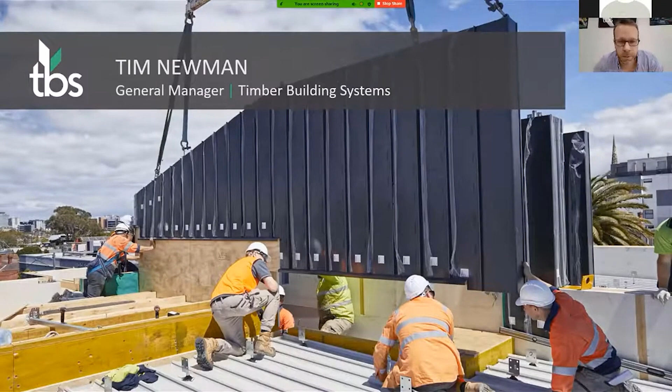So today I'm going to do a brief introduction to TBS, and then I'm going to run through 4 types of projects that we've worked on over the last 3 years, and just go through some manufacturing challenges in each of those projects, and what we've learned and where we are today. And at the end, I'll wrap up with some of the key challenges in fabrication from our point of view.

So TBS was established in 2014, so we've been running for 6 years. We design, engineer, manufacture and install buildings. So it's important to note we're not builders. We are a manufacturing business, and that's what we focus on, lean manufacturing of buildings.

Our wall system's customizable. It's obviously a timber wall system. We build it up to whatever our customers' needs are in terms of internal structure, cladding, and we're capable of up to 7 stories. So we'll talk about the 5-story building we do in New Zealand at the end, but the system is capable up to 7 stories, and we believe we can push it beyond that with some more work.

Our production facility in Dandenong here is running 2 linear production lines, very similar to an automotive production line. We're currently just running 1 shift, and we're building about a 2-bedroom apartment each day. We'll talk about integrated supply chain through the presentation. It's very important to manufacturing, and we've come a long way in the last 3 years to integrate our suppliers into a manufacturing business.

So our system is a fully integrated structural timber wall and floor system. This is the wall build-up. We use a structural timber internal lining. We frame up to whatever the customer's requirements are, insulation, building wrap, battens and cladding to whatever our customer's needs are. And we have post-tensioning steel columns throughout the walls as required.

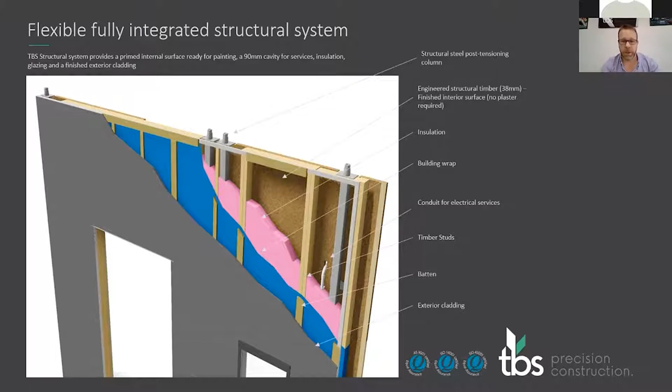So we increase or reduce the number of those columns depending on the style of the building, the overriding loads of the building, and what's needed. Exterior cladding, you'll see through the projects, we've used various different exterior claddings with different levels of success, but we're happy to give any particular type of cladding a go except for brickwork, obviously.

TBS's approach to quality is aligned with the Toyota Way, which is centered around four key philosophies. Long-term philosophy. So this presentation goes through the various learnings in different projects, and that's aligned with our long-term philosophy of quality. So improving on every project over a long term. The right process will produce the right results. So we're focused on the processes on our production line, the right processes to achieve the quality and the speed that we need on the production line, because at the end that gives you the right results.

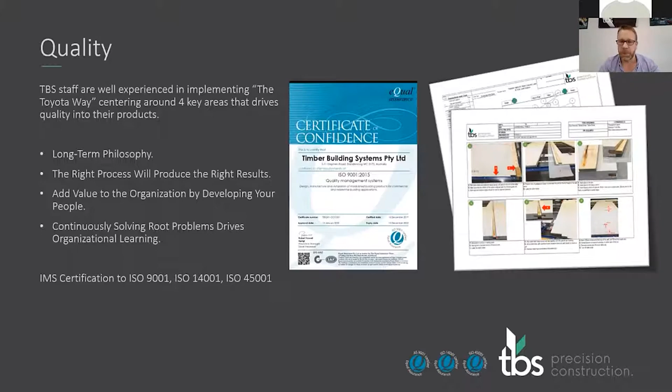We obviously value our people, and we add value by developing the people through the business, and continuously solving root problems drives organisational learning. So we're always looking to solve problems and embed the solutions of those problems back into the business systems. So our production line is, as I mentioned earlier, 2 linear production lines, a wall panel line down this side here and a flooring line in the middle. It's designed so that as we expand, we can bring material into the center of the line and feed out into 2 lines.

So a linear production flow of material, and making sure that we minimize the unnecessary motion of material through the plant. So material coming in will come into the center aisle here and then feed off the lines, add value onto racks, onto trucks and out. So from a lean point of view, we're minimizing the motion waste of material through the plant. So this plant's developed a lot in the last 3 years from that first building that we're going through now. With the initial building, we only had this part of the line running to build that building.

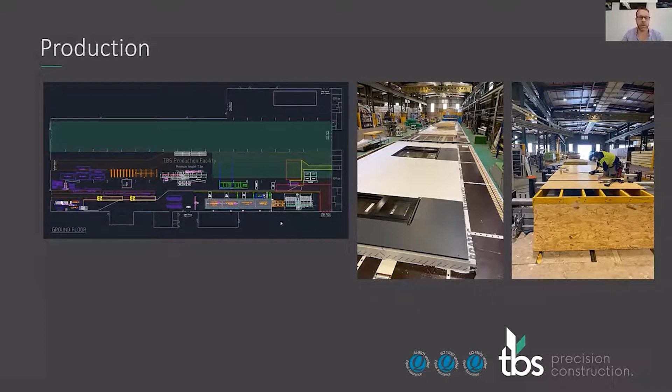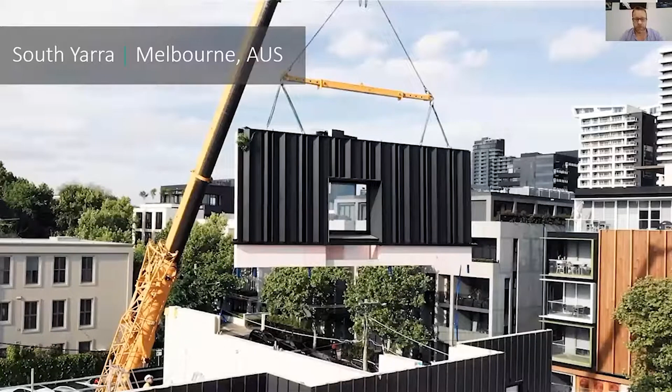So then we were looking to move on to another prefabricated building. We were looking for something that was going to be pretty straightforward to manufacture, but this one was far from that. This is a building we did in South Yarra. We added 2 luxury apartments over the top of a shopping arcade. And you can see down here, this is the shopping arcade.

We took the roof off, which I'll go through in a sec, and added 2 apartments over the top of it. In this job, we also did planter boxes. The original design had separate concrete planter boxes on the roof of a timber building. So we did some excellent work to integrate these planter boxes into the structure of the building to be able to take the load of the soil and the plants down through the structure of the building.

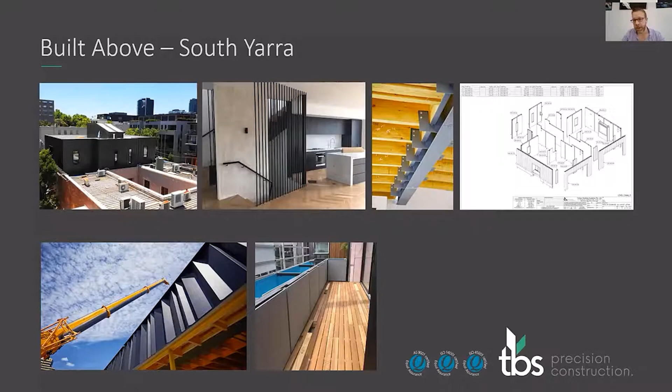We did the deckings as modules. We did a unique cladding. So this is an anodized black aluminium cladding. We did all of the structural steel in the building. And you can see here all the different panels that we had.

So a lot of the things we learned leading into doing this project is from a fire point of view, all of our walls had to be 60-minute walls inside and out. So we went through a range of fire testing at Warringtonfire to achieve the 60-60-60 FRL. And we've continued to do that throughout all of the future projects that we've worked on.

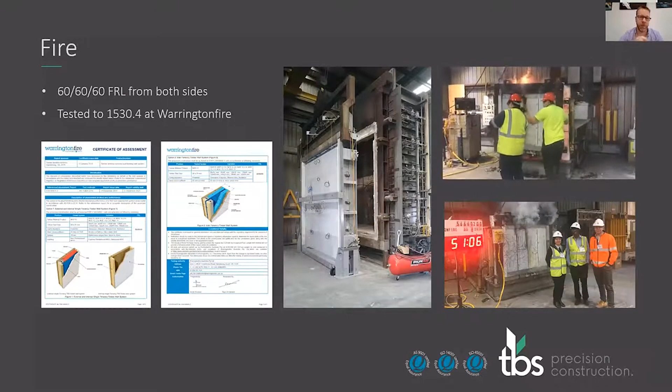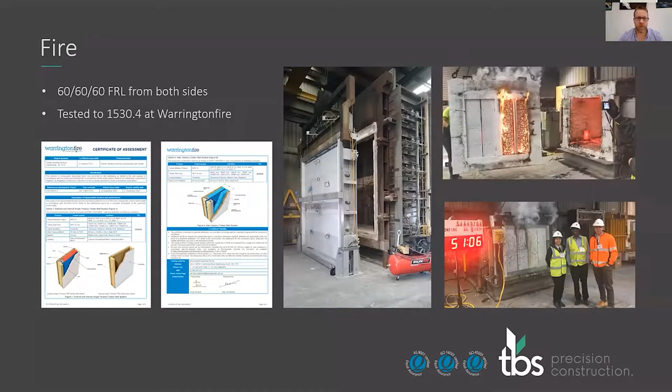So now I think we have 4 different cladding types certified, about 3 different wall types. All of the joins between our panels are tested, and that's a joint, the top one on the right, that's a joint test, to ensure that the system is fully compliant for fire. In fact, the latest wall panel we're doing at the moment has gotten 90 minutes from the outside.

Weather tightness is a big thing in New Zealand. Leaky house syndrome and compliance to E2 present a lot of challenges to us on a panelised system. And with some great work done with the CAMP.H and Melbourne Uni, we verified the seal system that we were using, and we've run full wall and window testing to E2 VM1. And going on from that first project, we've actually built our own water test facility so that we can continue that work as we develop the process.

We can see here some modelling we did to verify the gap between panels, and to make sure that within the tolerances that we can manufacture it to, the seal will still work. We've also spent a bit of time modelling some of the building physics and moisture in the walls, and making sure that once installed, the walls are going to dry out and we're not going to end up with mould issues or condensation on the steel columns and so forth.

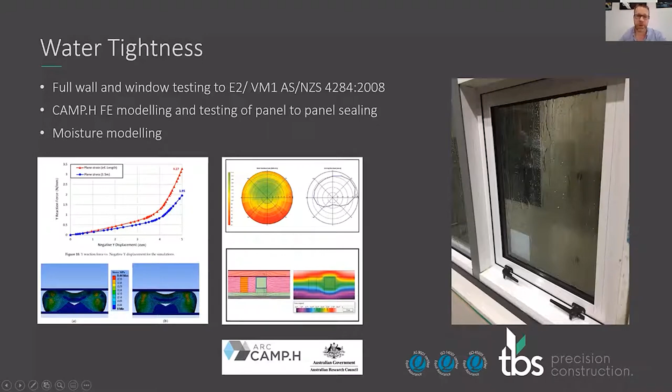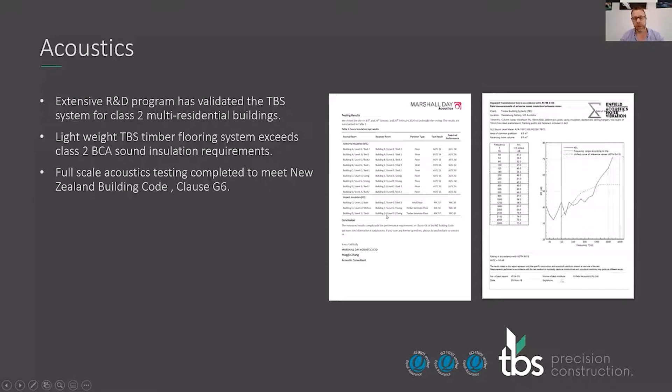Acoustics, we've done a lot of work on acoustics before entering the New Zealand market, but the way they test in New Zealand is slightly different to Australia. So we set up a new acoustics test example in our factory, and we redid all the acoustic works to make sure that we were compliant with the New Zealand code. And then on this particular first building, we verified the acoustics at every stage of the design to ensure that we were getting the level of soundproofing that we had planned.

One of the important learnings out of this, and it's talked about a lot in the automotive industry, but it's also talked about a lot in this industry now, is making sure that we make early design decisions. So through all of the engineering development of that building, we were still making a lot of decisions, right up to production, which didn't really give our supply chain enough time to react, and it was a very slow manufacture. We didn't hit the manufacturing rates that we wanted to hit. We stressed the team out quite a lot heading into the start of this project, trying to get ready to start manufacture.

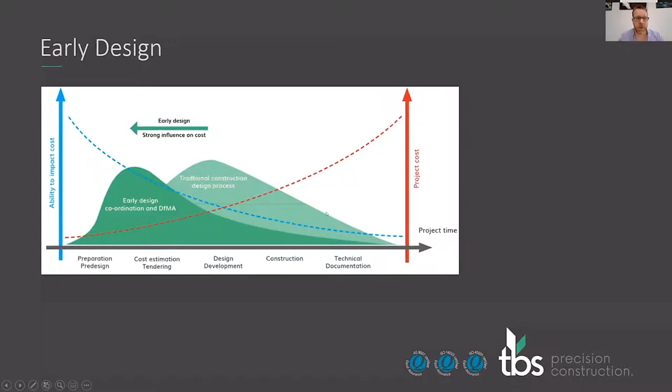So we've worked pretty hard on our processes now to try to pull all of the coordination of the building early on in the piece, so that it's all done before we enter into our shop drawing process. So we shouldn't really be making any decisions post entering shop drawing. So we have a list of a range of milestones that we run through the project, which is very, very similar to how we've developed cars and progressed the design of a car.